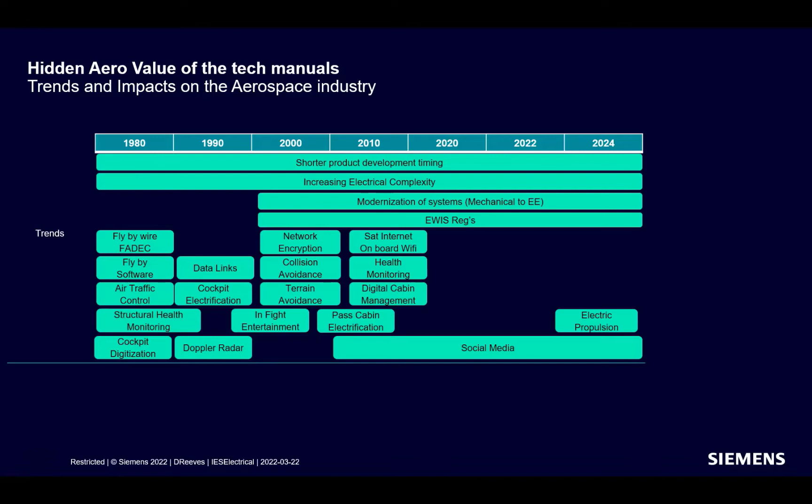Here are some examples of some of the big electrical developments over this time. Starting in the 80s, the move to fly-by-wire really gained hold, along with digital engine controls and cockpit digitization. These became the norm. There was a big move to improve safety, with collision and terrain avoidance systems that followed. The movement continued to bring electrical technology to the passengers with the introduction of digital cabin management systems and onboard Wi-Fi. Now today, there's an increased awareness of climate impact and sustainability, and this is a big area of focus, which is leading towards development of electric propulsion, representing another big step in the technology advance in the industry.

Thank you, Steve. So in supporting the technology on the products, technical information needs to be delivered to the end consumer. Since the 80s, this has evolved from paper manuals, books in PDF and flat document form delivered on CD and DVD, and then via websites. And as we see from engagements we have today, the industry is slowly moving towards an integrated MRO OS system.

How do we get the technical information to the required end user? For many years, paper manuals, CDs and DVDs were being delivered at the point of product delivery. Whereas today, using the internet to reach maintenance and repair organizations, we can speed up the process dramatically, allowing authors more time to document and process technical information and changes prior to delivery.

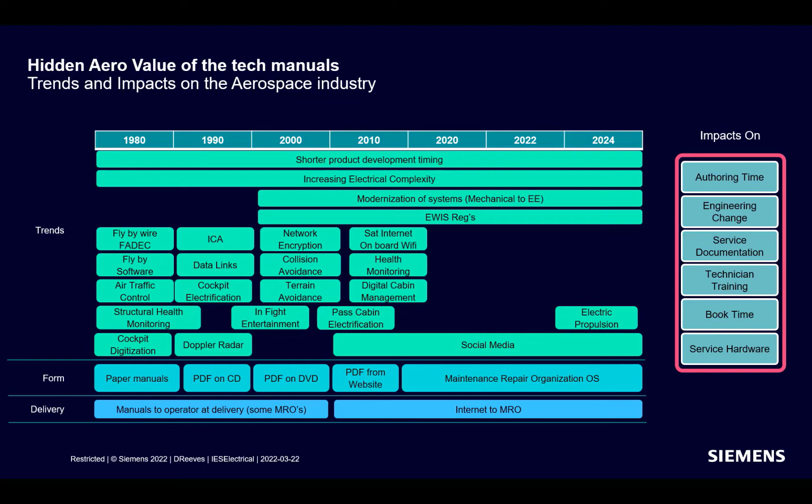All of these elements have a direct impact on six core areas of service information provision: authoring time, engineering change processing, service documentation, technician training, book time, and service hardware. All of these impacts need to be addressed, and going forward we will walk you through how the product suite we have addresses these impacts.

So how do we absorb the impacts felt by the OEM? We deliver on quality, efficiency, and by verifying the output of Capital Publisher. If we look at quality, by utilizing the digital thread we are ensuring content is correct by construction, so there's no manual human interference to the design data. This ensures quality in schematics, so no change from the design intent.

Capital Publisher also has the ability to consume various other forms of data, from specs, harness drawings, diagnostic data, and so on. This all enables us to enrich the end user's product interactions, giving them all the data they need to resolve the problems. Consuming content from engineering, manufacturing, suppliers, and compliance departments, we can provide a rounded, complete set of data to support the product.

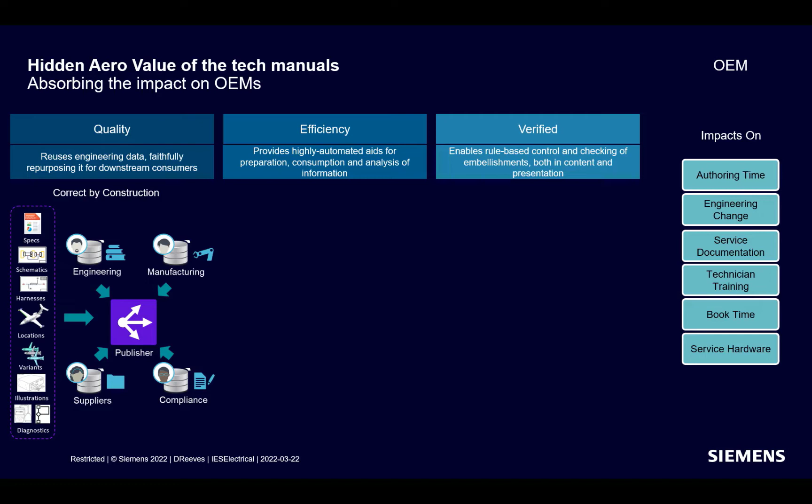Moving forward into efficiency and verified output, we need to provide automated aids for the tech author to ensure consistent, repeatable application of the tasks and activities they do day to day. Ojaswa Sharma is now going to walk us through three of the key automations we've implemented: rules-based driven diagram generation, fetch-related, and lock print regions. So, Ojas, over to you.

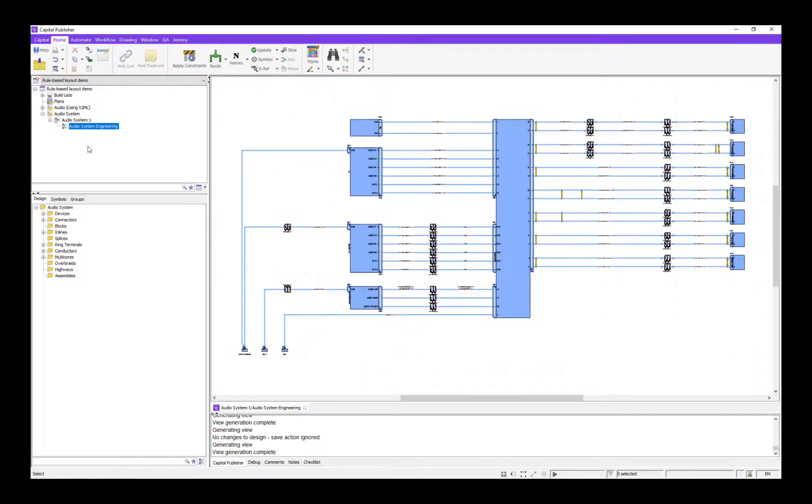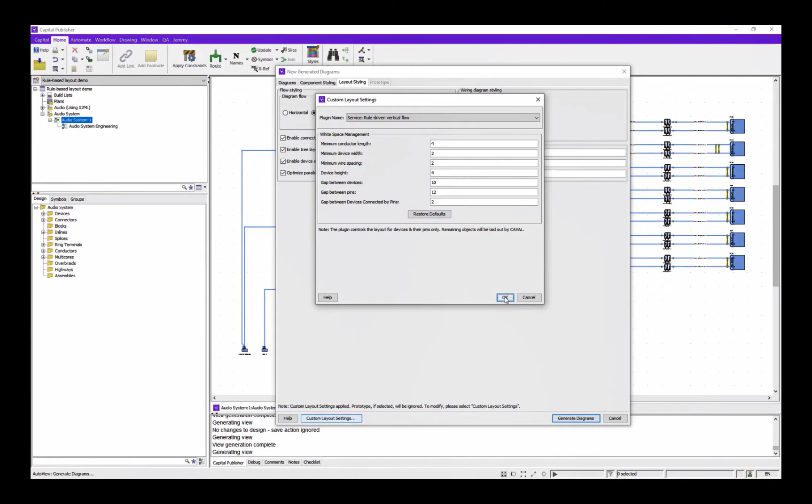Rules-driven diagram generation can help OEMs save drastically on authoring time and release service documentation faster. In this video, you will see how an engineering schematic can be transformed into a service wiring diagram using this technology. The layout algorithm identifies the diagram objects and places them in a neat layout based on predefined rules and various diagram generation parameters provided by the user. As you can see, with minor cleanup, the diagram is ready for release.

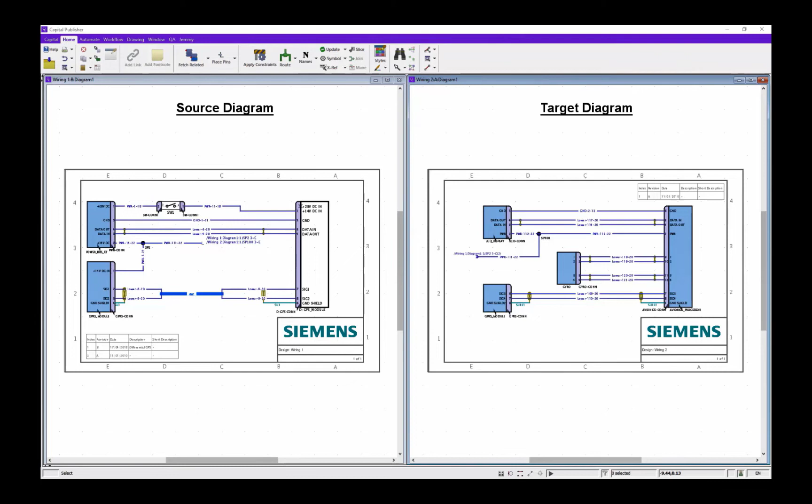Moving into fetch-related. Fetch-related action enables authors to complete wiring diagrams efficiently while ensuring quality. It retrieves directly connected objects automatically without the risk of any inadvertent changes to the connectivity itself, which could occur if these changes are done manually. In this video, we'll see how power connections from a source diagram can be added to the target system diagram using fetch-related action.

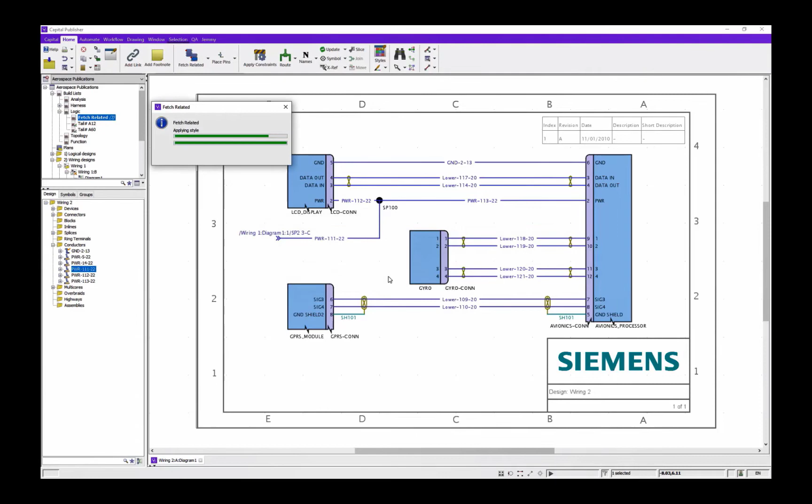The author begins by creating a build list to define the scope for the action and sets it as active. The author then selects any object with off-sheet connectivity and invokes fetch-related action to retrieve connectivity. The action can be executed multiple times to ensure all necessary objects have been retrieved. With a minor cleanup, the complete diagram is ready to publish.

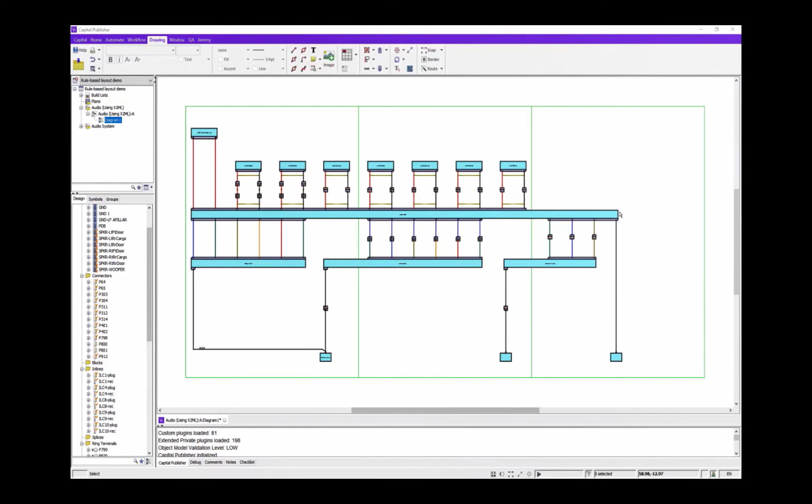And then finally, moving into lock print regions. Lock print regions is among many features which make authoring diagrams in Publisher more efficient. Print regions in a wiring diagram help authors in distributing content over pages and make them print ready. In this video, you will see that print regions can get easily disturbed while embellishing wiring diagrams, which can potentially cause rework and even inadvertent errors. Therefore, by locking print regions in their place, authors can work efficiently and ensure quality in the service documentation.

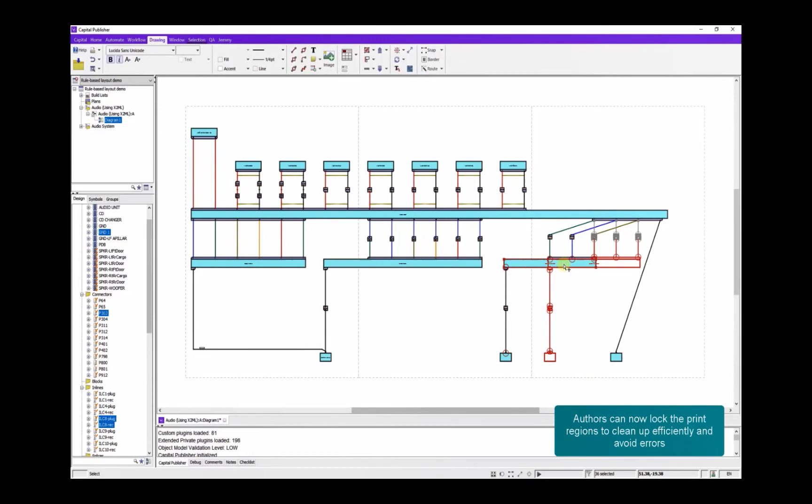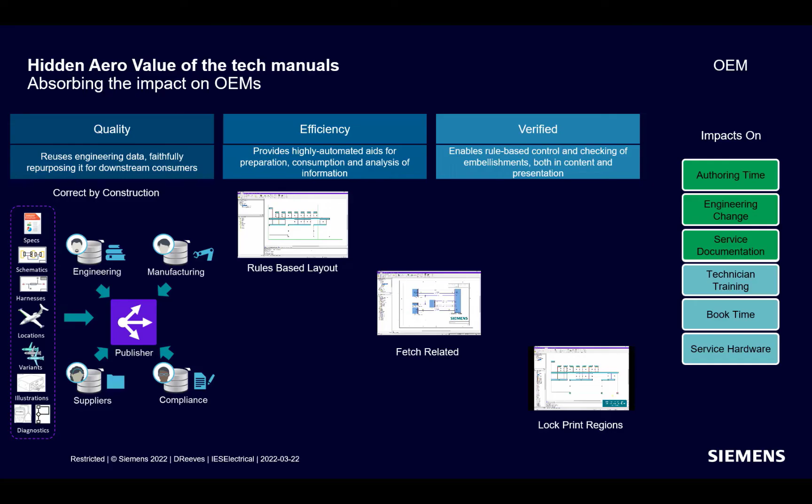Thank you, Ojaswa. So with all of these features, they help to reduce the impacts felt by the OEM, specifically targeting impacts on authoring time, engineering change, and service documentation. Bringing an efficient and customizable approach with the view that MROs have today with the data is key to addressing the impacts they feel.

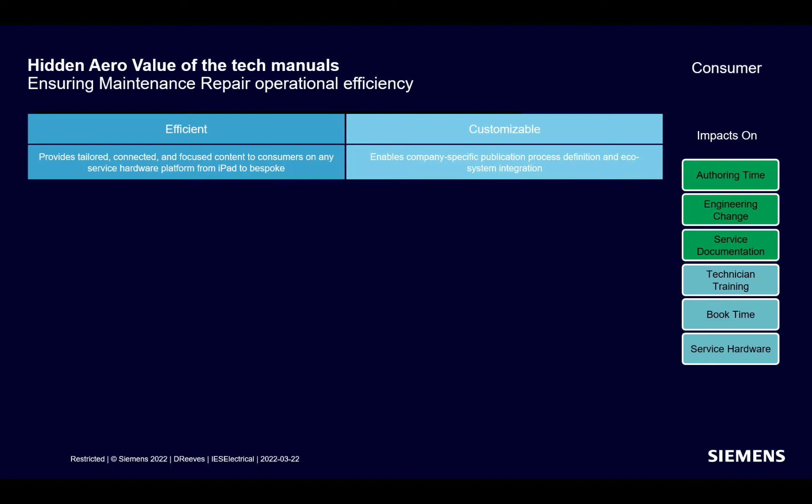Being efficient, it's critical to deliver the right information in one easy-to-use package. Guided diagnostics play a major part in rectifying issues reported on products, and with our 3D integrated guided diagnostics, we are bringing a richer data flow to the technician's fingertips. Ojaswa will walk us through a short video of the guided diagnostics and 3D integration approach.

In this video, we will see how Service Smart clients can drive efficiency in the troubleshooting process with the help of guided diagnostics and 3D illustrations. Smart clients provide an integrated and interactive environment which enables technicians to view step-by-step guided diagnostic procedures along with other resources like wiring diagrams and 3D illustrations to understand connectivity and locate components faster.

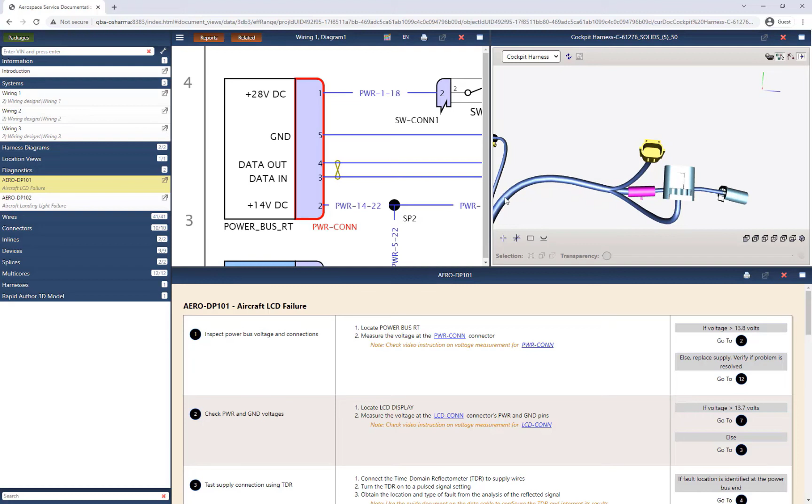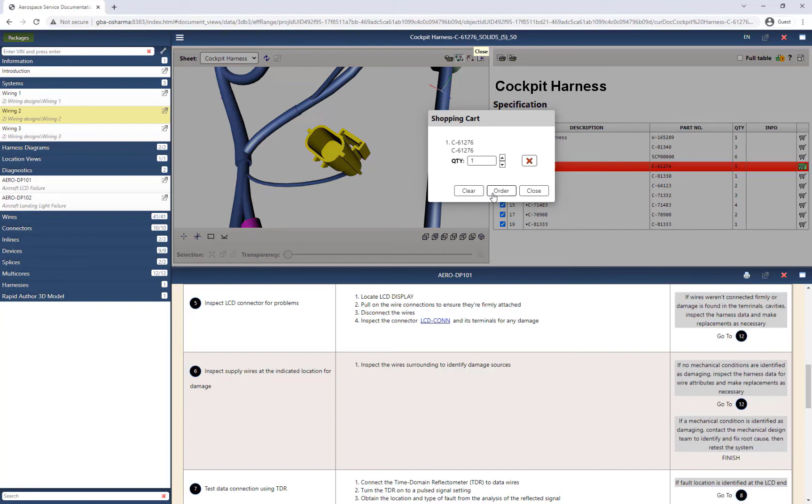Any voltage measurements or connectivity checks on the connector can be easily carried out with the help of face views containing pin and signal details. Once the fault is identified, in this case a faulty LCD connector, the technician can take appropriate action and verify the functionality after the fix is implemented. Thus, aided with guided diagnostics and 3D model integration, technicians can complete jobs faster and become more efficient.

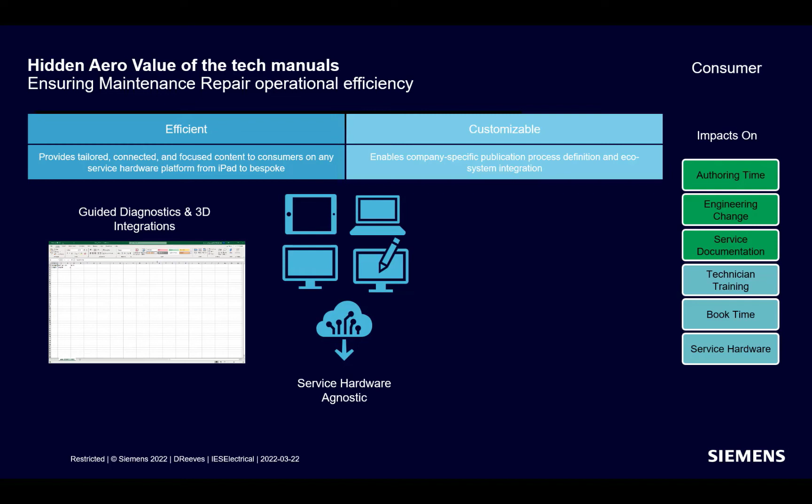Thank you, Ojas. So having all the data is just what is needed, but we have to make sure we are service hardware agnostic. The smart client can be used on a multitude of hardware configurations, from iPad, laptop, workstation, or even bespoke hardware. This is really important, that we're not tied to a single platform.

As products and systems change, there's a huge amount of collateral in legacy systems to support older products. By utilizing Mendix, our low-code application software, we can pull data from older support packages and systems as and when required by the technician. This removes the burden of having to maintain two, three, or even more portals that technicians have to access to retrieve information, or the bigger burden of having to migrate that data from an old system into the new system flow.

All of these integrations help us address the impacts felt by the MRO on book time, tech training, and service hardware.

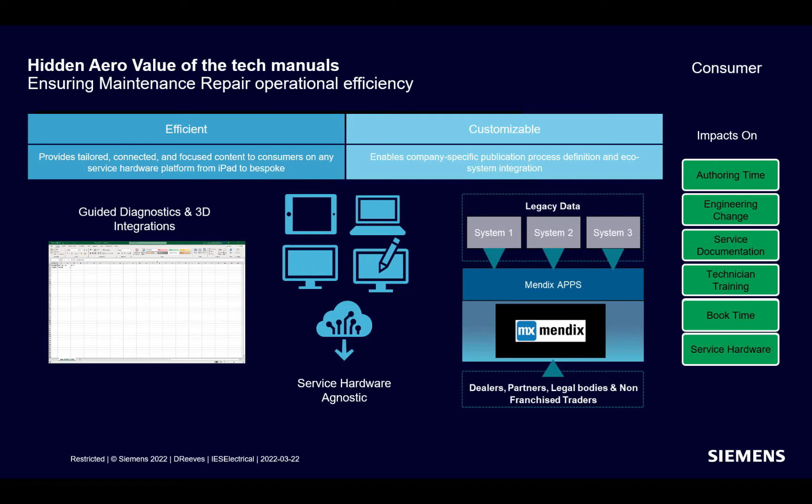To summarize how these values minimize the impacts we've seen so far, let's start with the OEM side. Capital Publisher enables OEMs to efficiently produce high quality and accurate output through delivery via the smart client. This enables a closed loop experience for the people on the ground in the field.

For the MRO, Smart Client enables technicians to stay in the workshop instead of in the classroom, increasing technician uptime. This is possible by providing all the required information in front of the technician in a single portal on a single screen. This reduces training elements needed to explain how you get to data in different systems.

By having all the data in the right place at the right time in a single screen, that enables us to get more jobs done with the same number of people at the MRO.

By ensuring all of the technical content is tailored to the exact tail number in front of you, that further drives improvement and helps get more jobs done and increase technician uptime.

With both the individual OEM and MRO values recognized, we deliver the joint values of increased fleet uptime, a decrease in AOG (aircraft on the ground), a reduction in warranty, and improved operator satisfaction.